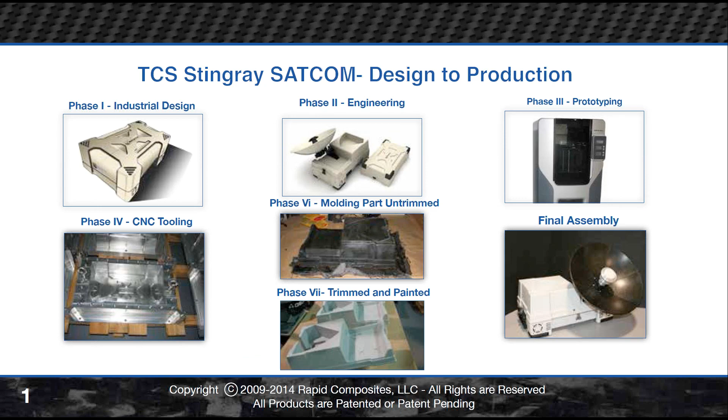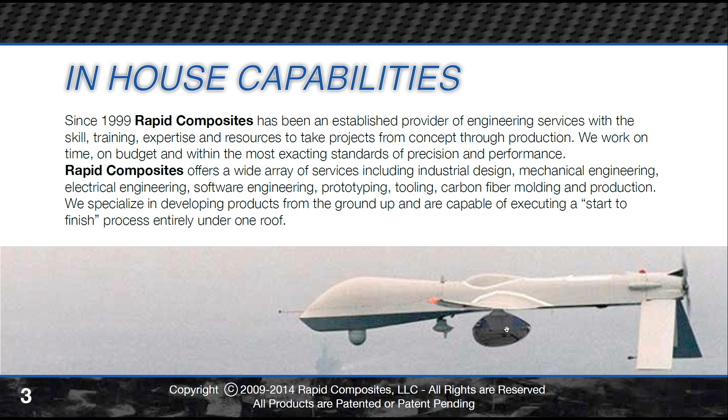We do industrial design, electromechanical engineering, as you can see my cursor here as I move along, rapid prototyping. We cut our own tools, we operate our own tools. This is a trimmed and painted component that goes to this mobile SATCOM device, and this was, at the time, the smallest mobile man-portable SATCOM system in the world. So we literally go from napkin sketch to full production in-house. This is a pod that we did for the Predator drone years ago, a 4-foot pod, to give you an idea. We have in-house industrial design, electromechanical engineering.

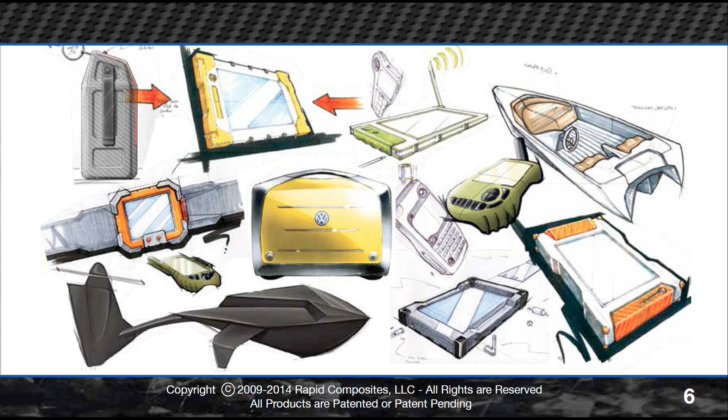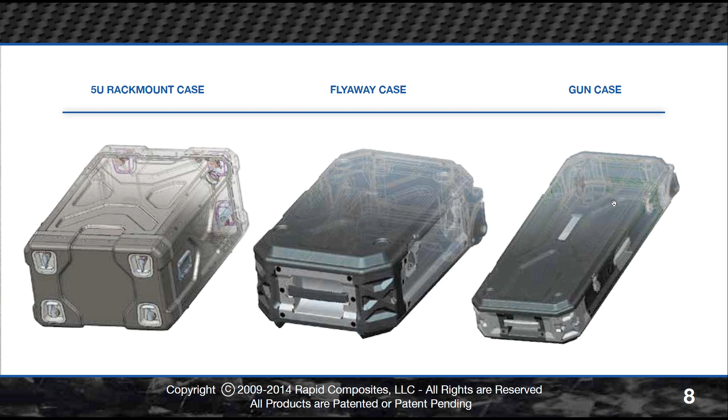We design and manufacture the lightest rack mount transit cases in the world, flyaway cases. We're even working on a new gun case right now. It'll be 30% lighter than anything on the market.

The bulk of the product that we make is for military applications, a lot of times for special operations type stuff. Most of it's domestic for here in the U.S., but some of it is done for international customers as well.

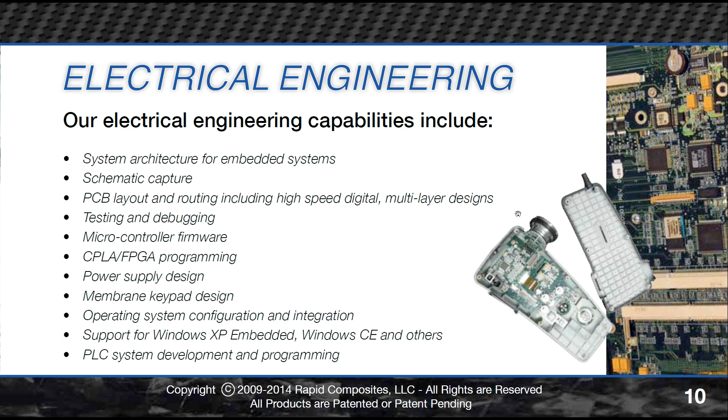We also have in-house electrical engineering capability. We do firmware, BIOS, and software. We have some testing capability, although over the years we've been trying to get out of the testing side of the business as much as possible, since most of our customers want third-party testing anyway.

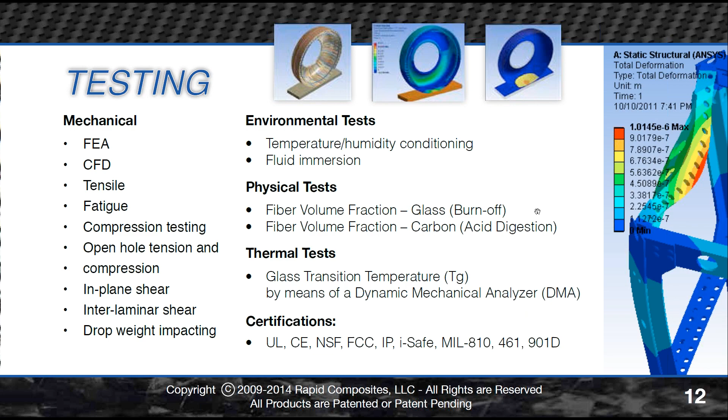Typically our stuff is matched metal tooling, core cavity tooling. The parts tend to be highly accurate. They're produced under a tremendous amount of pressure, and if you were to lump composite structures into two main categories, they predominantly fall under either a thermoset category or a thermoplastic category, and we work with both. But again, we focus on the high-speed versions of those processing techniques and materials.

We do in-house rapid prototyping. We spend a tremendous amount of energy on material science, really determining from the get-go what the best material selection will be for a particular project and process.

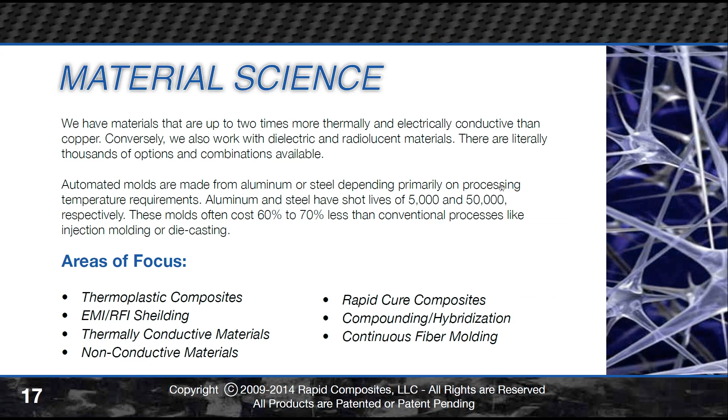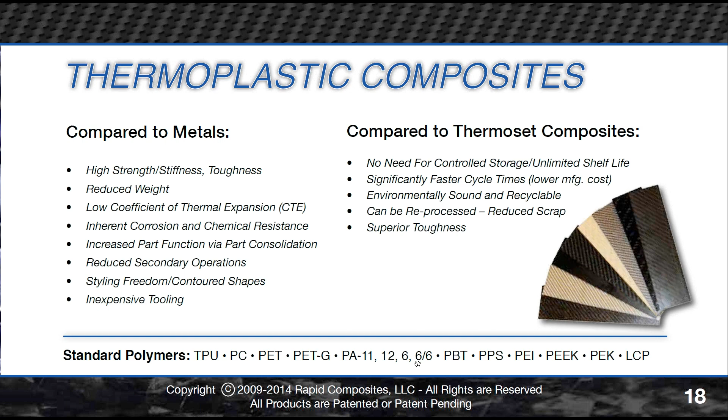This page right here, and we can get you, anybody who doesn't have a copy of this, the e-brochure. All of these thermoplastics you see along the bottom of this page here on page 18 are standard polymers that we work with in the thermoplastic stuff. And that'll become more relevant through my presentation, I'll explain in more detail.

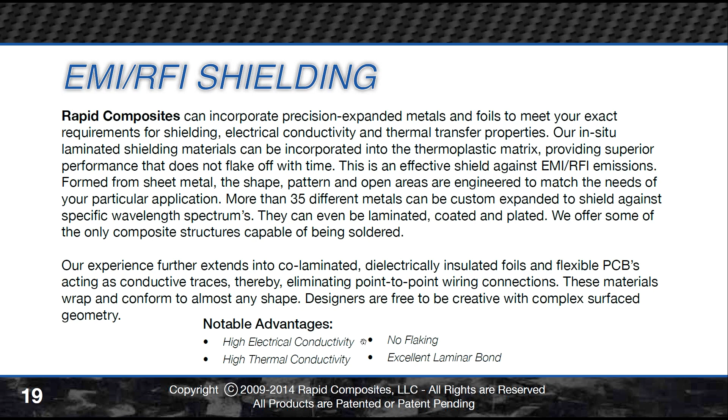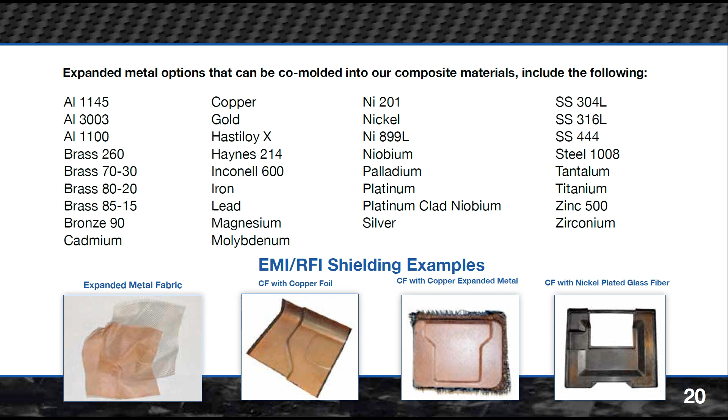We also do EMI and RFI shielding in some extremely unique ways. Right here on page 20, these are all metals that we co-laminate into structures for EMI and RFI shielding, and we're going to explain how a lot of this stuff is done, because in the UAV world, this is becoming more and more relevant, being able to strategically shield components that you want shielded versus ones that you might want in a dielectric material or a radiolucent material for radomes or antennas, that kind of thing.

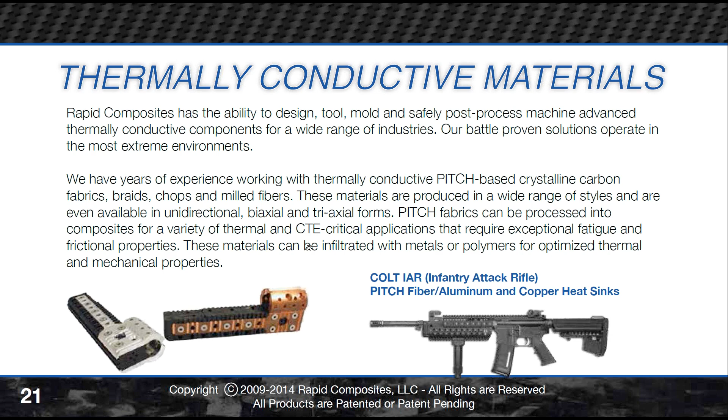We also work with thermally conductive materials. On page 21 here, it's kind of the start of it. We work with a lot of pitch fiber materials, and we create some extremely unique structures. We do everything from bonded fin designs with pitch fiber, which is a crystalline carbon material. We have pitch fiber up to 900 watts per meter K that we work with, so it's more than twice the conductivity of copper.

It's about half the density of aluminum, and therefore about half the weight of aluminum. What a lot of people don't understand about pitch fiber that really sets it apart is even when pitch fiber is at the exact same conductivity as aluminum, for instance, which is 200 watts per meter K, copper is 400 watts per meter K, about twice that of aluminum, pitch fiber's dissipative properties are about 4x that of aluminum. So therefore, it operates more efficiently than aluminum.

This may become a very relevant subject for some of you dealing with significant heat issues, like with speed controls or motors, that kind of thing. The way to think about pitch fiber is like a frying skillet. We've all fried eggs before, and if you were to use an iron frying skillet, for instance, and take it off the burner, it wants to store that heat energy for a very long time. Whereas an aluminum skillet will store that energy for a lesser amount of time.

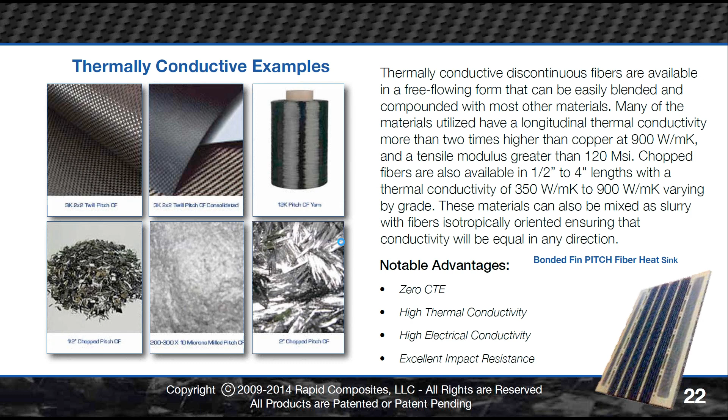Pitch fiber will do about 4x better than aluminum, so it's quite a bit more efficient. Now we work with a lot of conductive materials and superconductive materials, as you can see with pitch fiber, and we co-laminate metals in ways that are quite unique, where you can actually solder to the structures.

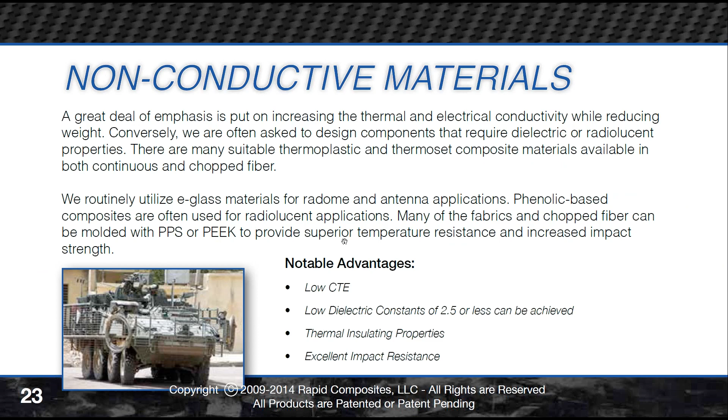We also conversely work with a lot of non-conductive materials. So we have materials like the ones you see here, in some cases like the e-glass polypropylene right here. It's got a dielectric constant of 2.5 or less. It's a very good durable material that we can mold extremely fast for radomes, belly pods, antenna caps, and that kind of thing.

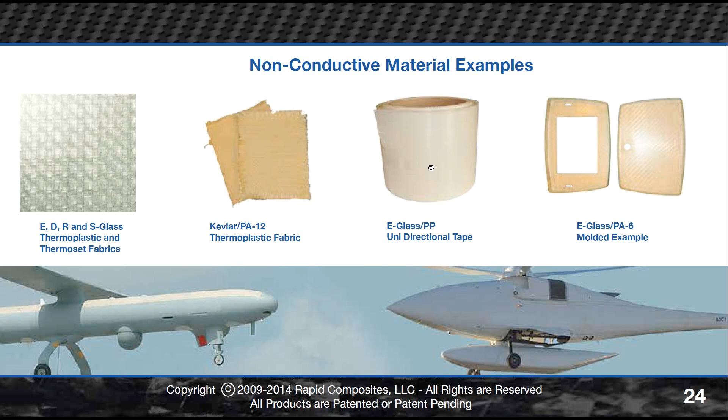In fact, in some cases we can actually combine it and insert-mold it into other materials that are more conductive. So for instance, we might shield around the perimeter and then have just one little spot that we plug into the mold that is non-conductive and radiolucent.

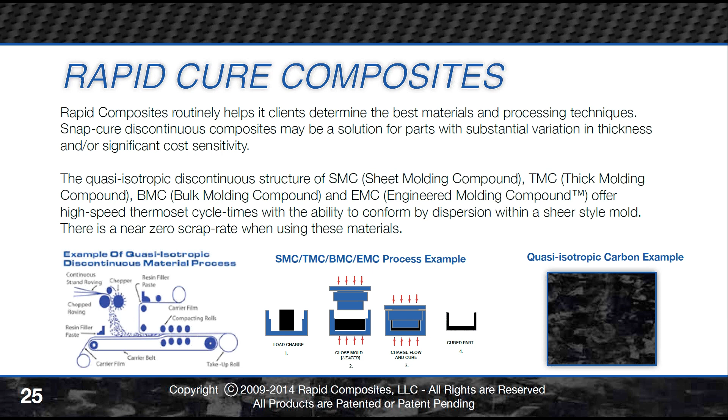So even when it's in a 2D form, it is 3D. It's very structural. And then imagine if you put a part into a 3D form, you do a highly contoured hull component, let's say for a UAV or a fuselage component. It's going to be massively more torsionally stable than you're going to get out of a typical 2D 3K kind of fiber, a woven type fiber. So another thing that we do a lot of is compounding and hybridization.

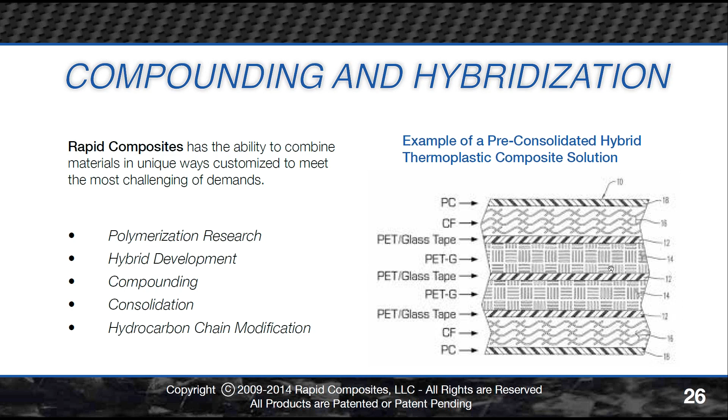So we get Class A surfaces on both sides, and that, up until this process, was pretty much unheard of in the thermoplastic industry. It's been a big problem for many years. Most thermoplastic components in the industry have been dedicated to behind-the-scenes components, things that you'll see behind the bumper of a vehicle, parts that you would never come in contact with unless a vehicle was in a wreck or something like that.

We do a lot of continuous fiber molding. That's going to be another thing you'll hear a good bit about in the follow-on presentation. We work with both continuous and discontinuous materials, and with materials that are pre-impregnated with thermoset resins, but also with thermoplastic resins.

We also work with them in drapable fabric form in both thermoset and thermoplastic categories, and in a pre-consolidated form where they're consolidated into a continuous thickness. For instance, we have materials consolidated at 1 millimeter, 2 millimeter, even quarter millimeter increments, up to 6 or 8 millimeters in thickness, that can be heated to their melt point so they become like a wet, drapable towel, hot stamped and simultaneously cooled inside a matched metal tool in a vertical press.

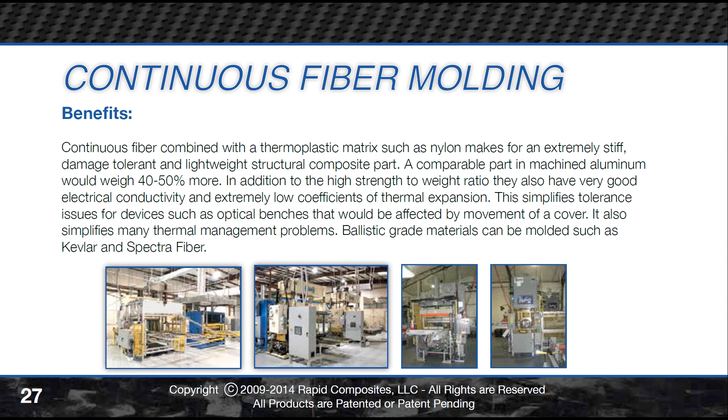There's limitations to it, and one is that it wants to be typically a continuous thickness. We'll get into more detail on that in a bit.

So just some examples. Not only do we go from napkin sketch to full production, but in-house we have all those engineering services I explained. We do rapid prototyping, we also cut our own tooling, and we have a massive machining capability in-house. We can machine 10 by 5 feet by 2 feet in-house.

We also operate our own tools. We design our own press systems, shuttle systems, carrier systems, and heater systems. This is an example of one we did. That's me standing next to the machine, to give you an idea of the scale. And I'm 6'4".

So this machine is basically about 32 feet long. The press sits on the back side. And we developed it for the floorboards for the Lamborghini Gallardo and the Audi R8.

Lamborghini is a customer of ours. We work with their ACSL, Advanced Composite Structures Laboratory, and we've been the behind-the-scenes partner on their thermoplastic work that they'll be putting on their next-gen vehicles. Their floorboards, at the time they came to us for the Gallardo and the R8 -- basically the same car, looks different externally, but internally the chassis and drivetrain is identical amongst those two platforms.

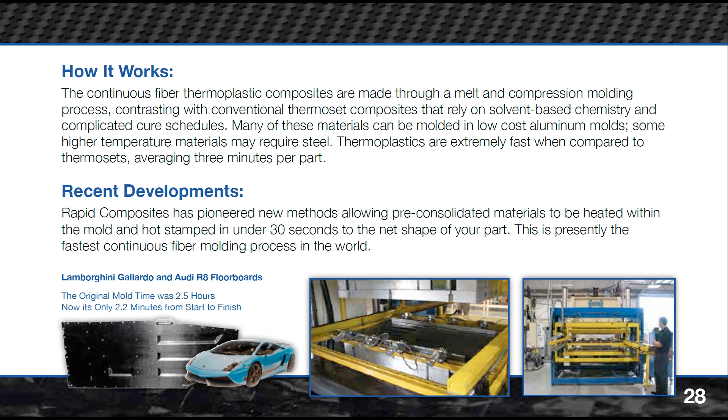The floorboards were being produced in 2.5 hours with their fastest vendor, using an autoclave approach. We took it, with this shuttle system, heater system, and press configuration, from 2.5 hours down to 2.2 minutes per part. So it's a very fast process.

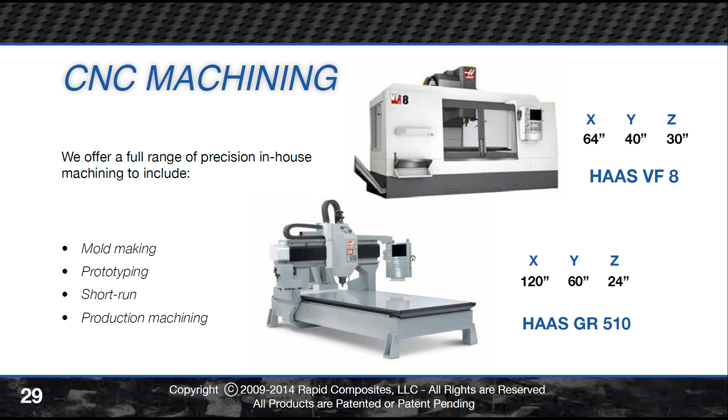This will give you an idea of the typical machining centers we work with -- big build envelopes and accurate, large build envelopes. And we're doing matched metal tooling a lot of the time. In most cases, it's matched metal tooling.

I'd say about 80% of the time when we're talking about mid-range volumes. Mid-range volumes would be anywhere from about a 200 unit per annum build to a 5,000 unit build. Assuming there's adequate draft on the molds, we can typically get 5,000 shots out of a single aluminum tool set, assuming they are plated.

When we have to go to higher temp materials, instead of running nylons or vinyl esters in the thermoset world, going to something like PEEK or LCP, liquid crystal polymer, which are real high-temp materials, we then have to go to steel molds. With steel molds, assuming adequate draft, if you do P20 with S7 inserts, 50,000 to 250,000 shots is possible out of those tools. So the volume can go up significantly.

Give you some examples of the types of products we do currently. These are all products we've produced in-house, and it's only about 10% of what we've done over the years -- it's just what I'm allowed to show.

This is a 2U rack mount system we did for a defense company. We do pin-fin heatsink solutions for ATR chassis, docking stations, and transit cases.

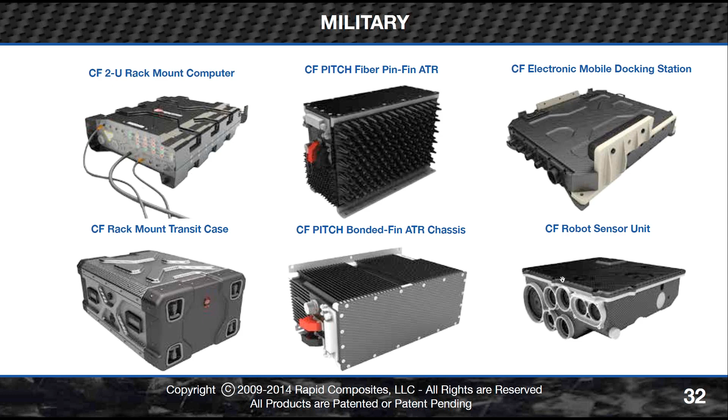This is a bonded pitch fiber solution, bonded fin design. This is a head unit for a robot. This is a positioner system for a 1.2 meter reflector. It's a gimbaled motorized SATCOM system, a KU band SATCOM system. We work on everything from LWTS, lightweight thermal weapons systems, to handheld computers.

This is that SATCOM system you saw in the beginning. These are pitch fiber heat sinks we did for a machine gun that perform substantially better than an aluminum heat sink. And we've done an aluminum and a copper version of that.

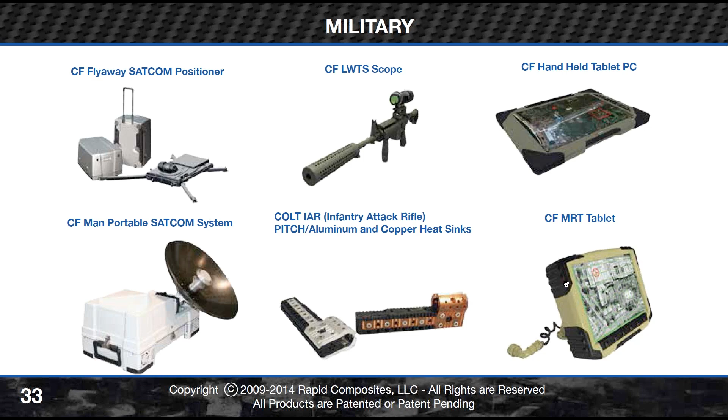We also do MRT type systems, mobile data type terminals for vehicles, including Humvees. This is a handheld device we produce, tablet computers, FLIR biocular displays, the cameras that give a 360-degree view around the Stryker, the Bradley, and the M1. Basically, every one of those armored vehicles gets this camera system that we designed. It's a thermal system. It's actually more a safety system and a security system than it is anything else.

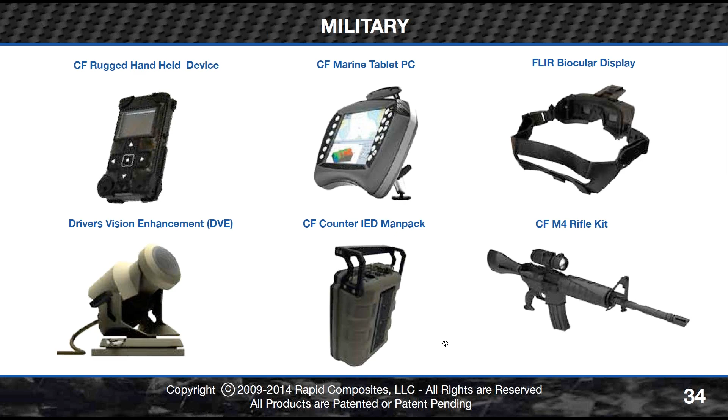We do composite structures for weaponry, all sorts of different kinds of handheld devices, tablet computers, even some commercial stuff. There's an eyelid retractor for ophthalmologists. This is a fiber optic system right here. It's an all composite structure with an aluminum chassis that gets bonded into it.

We make the best attaché case in the world, we believe anyway. This is for the Lamborghini Aventador, in fact, and there's cartridge bearings in the hinges of this and gas strut openers.

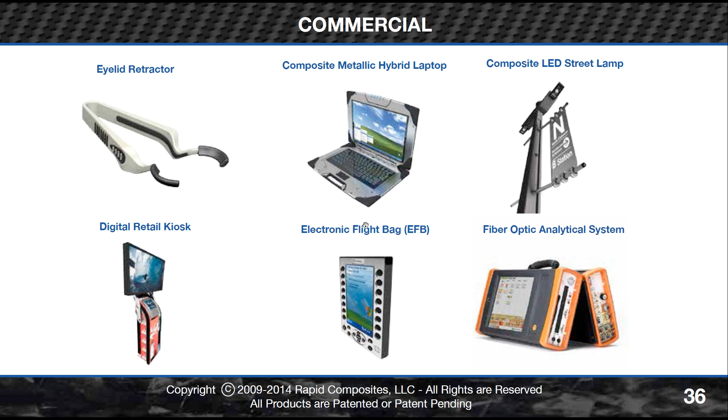Yeah. There is no purpose in the world for this, no practical or reasonable purpose for this product in the world, but it's a good showpiece for us to just show what we're capable of.

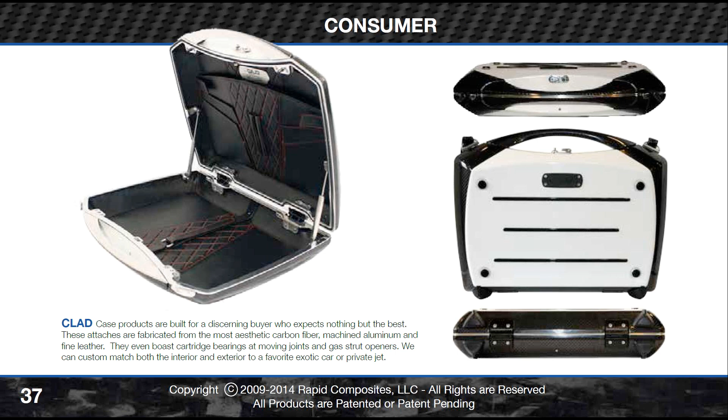Basically, every component on this product, except for the leather goods inside, we did in-house. They're pretty pricey. We're actually more inclined these days to not make them because they're so expensive for us to produce. Every fiber on this product has to be in the perfect place, and that's one of the hardest things to do with it. So the yield on production is not so good on this product.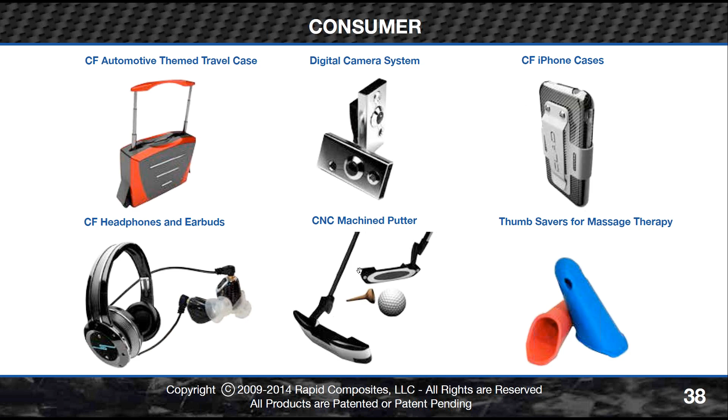So we've done earbuds and headsets and putters and a pretty wide array of products, as you can see, defibrillator, even grills. So we've worked on consumer products in the past. We do membrane keypad design.

One of our big things is, devil's in the details, right? Our objective is always to scrutinize every single component down to the last screw on the products that we manufacture. So we want our latch mechanisms to be the best and the most robust in the industry. We want them to be as ergonomic as possible and as user-friendly as possible. So our objective is always to make the best of the best of the best. You will see that across the board with the types of products that we do.

Our cam latch mechanisms are simple, they're rugged, they're ergonomic. There's no pinch points. We think through those types of things, and there's nothing worse when you've got a great product overall, but the human interface portion of it's not so good. What we've found in the past is, we do things like that for law enforcement. We develop product, especially things like handheld devices or mounting solutions, things that have a high degree of human interface with our customers. If they're not ergonomic and comfortable and easy for them to operate, they'll stop using them. And that can mean putting them in a dangerous situation if they're in law enforcement or military. So our focus is always to take those types of things into consideration in the products that we develop.

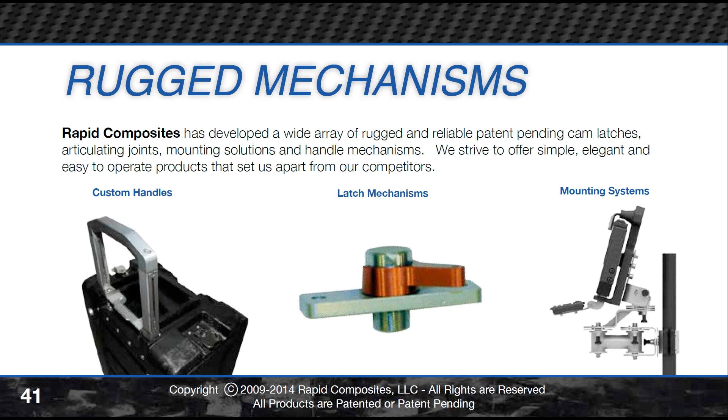These presses, there's two of them side by side. We've sold them to two separate customers. These presses operate on 600 amps at 480 volts, to give you an idea. So they're extremely powerful, electrically intensive machines, but they operate very, very fast. So the amount of energy that's expended per part is actually quite low.

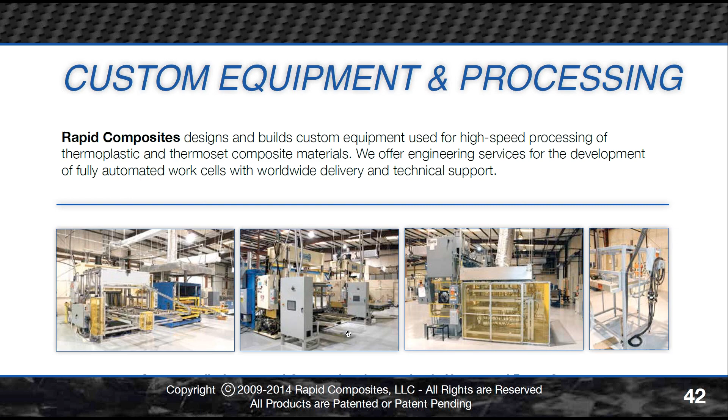So we're going to be using quasi-isotropic, discontinuous 3D fiber for the production of that fuselage. I'll definitely spend a little bit of time going over that process so everybody understands it, and offer our help for this cost.

So I'm going to move on to bring up that other presentation, Matt. I'm going to move on to the next presentation here, and I have a feeling this is going to bring up a lot of questions. The beginning of this, for a lot of you, is going to be the processes you are most familiar with, and you might even be doing right now.

So Alan, as you do your presentation, can we take questions while you're going? Mike, what's your suggestion on that? If you like, you can either do that or we can save them to the end. The only problem is we've got, how many slides do we have on it now, Matt? 65, yeah, I think it's 65. Yeah, I don't think we're going to go through all 65 slides. I can blow through a lot of them pretty quick. Maybe halfway through right now. Okay, halfway through. So I'll be happy to take any quick questions as I go through the presentation. Then at the end, I'm happy to stay online as long as I need to. Okay, does that make sense? Yeah, I think that's good.

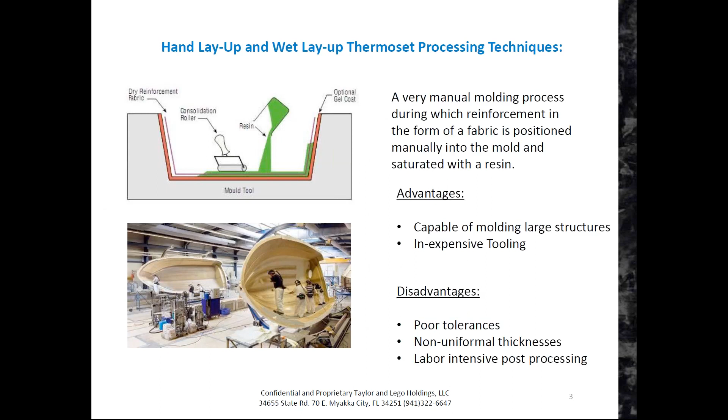Basically, this approach is you apply fiber and resin until you build up your desired thickness. In most instances they'll vacuum bag it, but there are people that still do not, and those people will have even worse variation in thickness. If you did a boat hull like the one these people are standing in, they probably have a variation in thickness of at least 1 inch, possibly even 2 inches, from one end to the other. So you end up with a lot of resin richness or resin deficiency, neither of which is good.

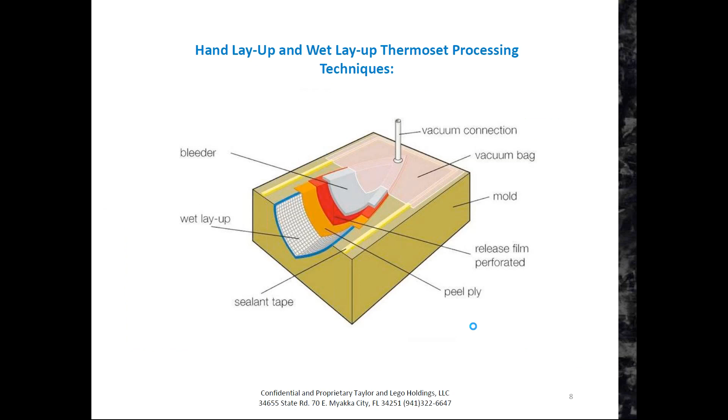So it's a very messy process with a lot of expendables. There's a lot of stuff that goes into the landfill. This is absolutely the antithesis to anything environmental, I can tell you. There's nothing environmental about this process.

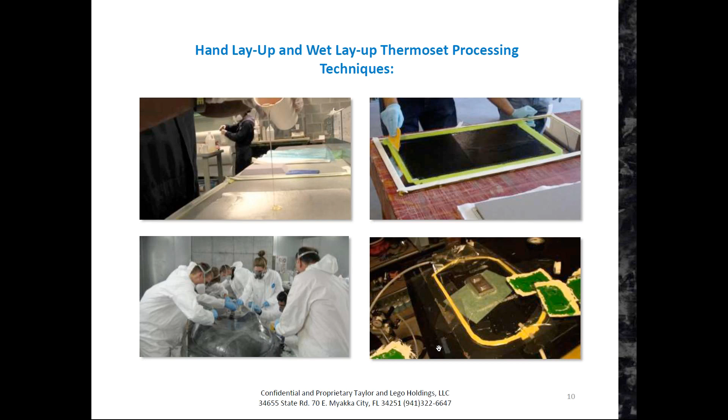The next process, number 2 most popular in the industry, is a step up from what you just saw. But I should go back for one second—there's something I forgot to explain. When people are typically doing a hand layup or wet layup process and vacuum bag it, they're pulling 1 atmosphere of pressure on that bag. One atmosphere equals 14.65 psi, so it's very, very low pressure.

In some cases, people are allowing this to air cure at ambient room temperature, and depending on the resin system, the specific epoxy, and the amount of catalyst used, among other factors, it can take anywhere from days to weeks to get your first part out of the mold. And not only that, because of the inaccuracy, the parts are going to be very difficult to trim and post-process afterwards.

Now, if the parts are small enough, a lot of people take these molds in the vacuum bag systems and put them into an oven. They're still only at 1 atmosphere of pressure, but they're causing the resin to kick faster by applying more heat. So you can get the parts a little faster, in as little as maybe 2.5 to 3 hours per part, but you still require that trim. On a very complex part, you could spend all day to get one part. This is what is being done 80% of the time around the world.

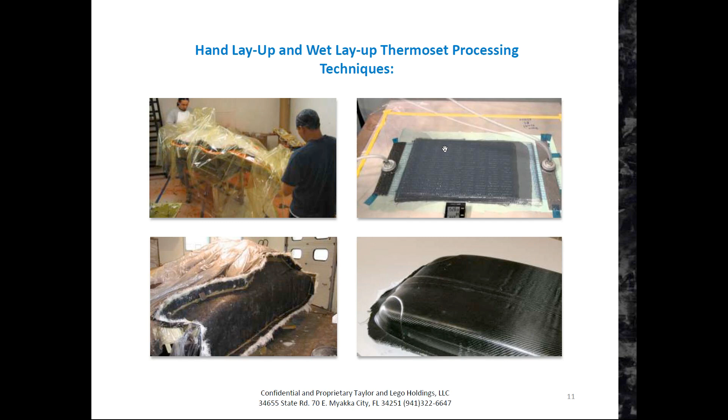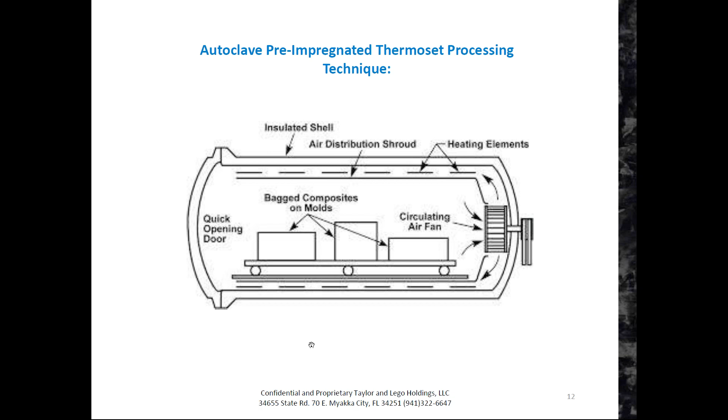The number 2 process is an autoclave approach, where sometimes they will use a more accurate tooling method. They might make a single-sided aluminum cavity mold and apply the materials to the inside, in a similar fashion to wet layup, except they're not brushing or spraying the resin.

A lot of times they'll apply it through a vacuum type approach, or they'll use pre-impregnated fabric materials, which is really the most popular with this type of approach. It still gets vacuum bagged, and the vacuum bagging process outside the autoclave is done to massage everything into place. It's still only 1 atmosphere of pressure outside the autoclave, but once it goes in, you can apply about 10 atmospheres of pressure.

So let's just say about 150 psi in total - that's literally 10 times the pressure on the part. So your thicknesses tend to be more uniform. But because it's still low pressure compared to the other processes I'm going to get into later, you still have some reasonably significant variation in thickness.

Just to put it in contrast, the variation in thickness on, let's say, a fender for a Ferrari - and Ferrari is very good at this process, we know them, they do an extraordinarily good job - a fender on a very high-end vehicle of theirs might have a variation in thickness of 20 or 30 thousandths of an inch from one end to the other. So about anywhere from 0.5 millimeter to 3/4 millimeter approximately.

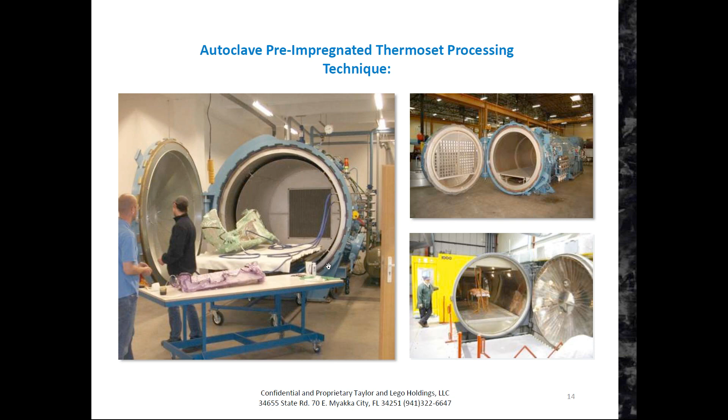So there's a lot of diagrams in here that explain the process. In the next categories, I'm going to try to move on as quick as I can because we're running out of time. Sorry if any of this seems a little disjointed - it's just a lot of information to try to cover, and it's important to understand these things before trying to understand why I'd suggest going to a more expensive tooling approach.

Alan, I think we'll definitely have to do a part 2, because this is really great information, and I think having a part 2 to go more advanced would be a good follow-up webinar for you to finish up the slides you did prepare. Sure.

So, the next processes I'll explain are RTM and VARTM. Okay, and these two processes - RTM has been around a while.

That's the third most popular approach in the composites industry as a whole. It stands for resin transfer molding, and VARTM is a kind of new spin on RTM - vacuum-assisted resin transfer molding. That's becoming more and more popular.

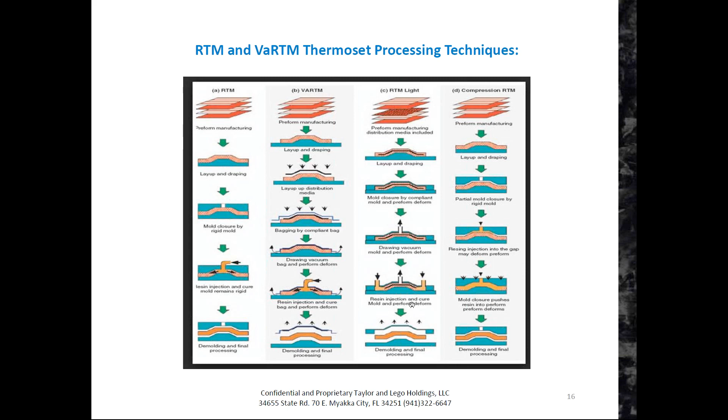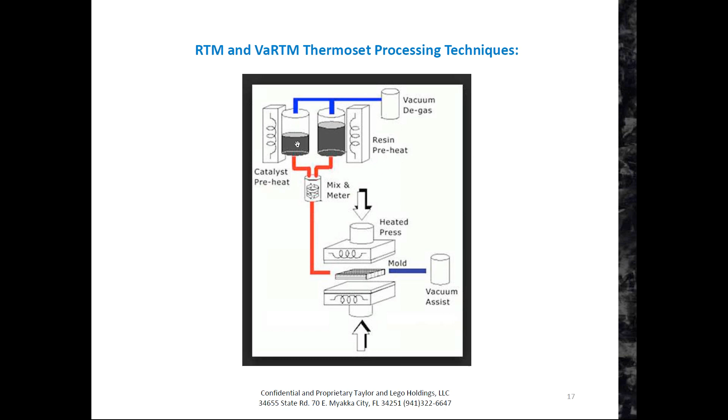There's so much to what I'm trying to describe right now in one hour - it's not funny. There's a lot of other diagrams in here that I included to explain different embodiments and variations of how RTM and VARTM work, and how you would layer the materials. There's a breakdown of structurally how you'd put together a mold and how you would seal it and shut it off.

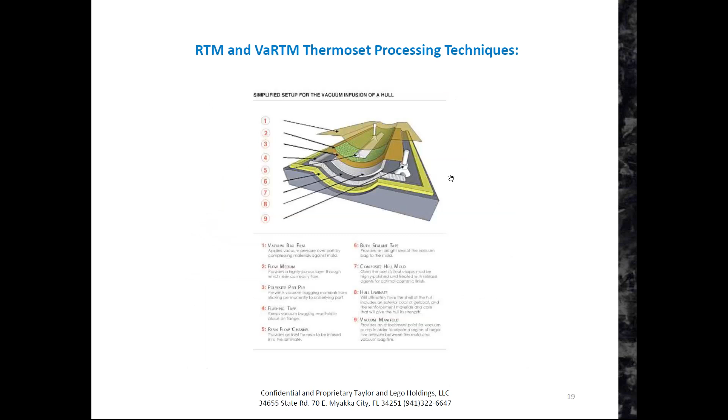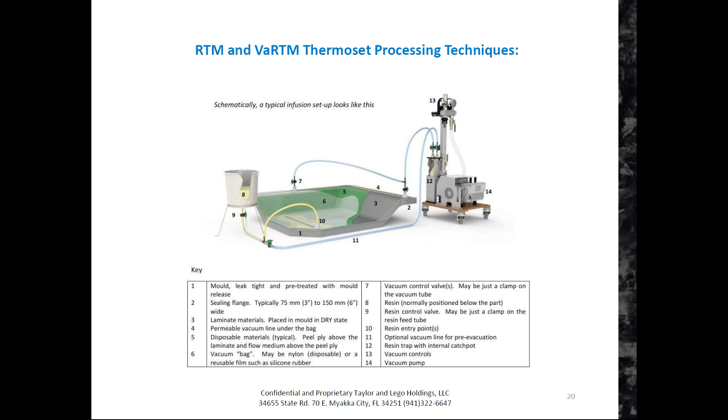This right here is a mobile unit. If you're doing a really large component - sorry, that mouse again, mind of its own - this mobile unit is a pretty neat system, and it allows you to move it around in your shop. While you're demolding one component, you could be going to another mold and working that mold while another's being demolded. This explains the process of how it works.

They are making one of these tubs in about 4 hours now, with the aluminum inserts and all of the bulkhead mounting for the engine and the suspension, the aluminum primary crash structures. So it's a reasonably efficient process, although still quite messy, and there's a lot of expendables that go in the trash and end up in a landfill for 10 million years. That's one of the bad things about all of these processes we've covered so far.

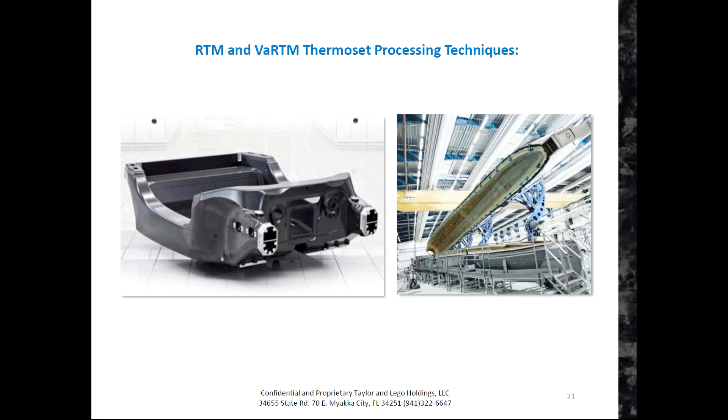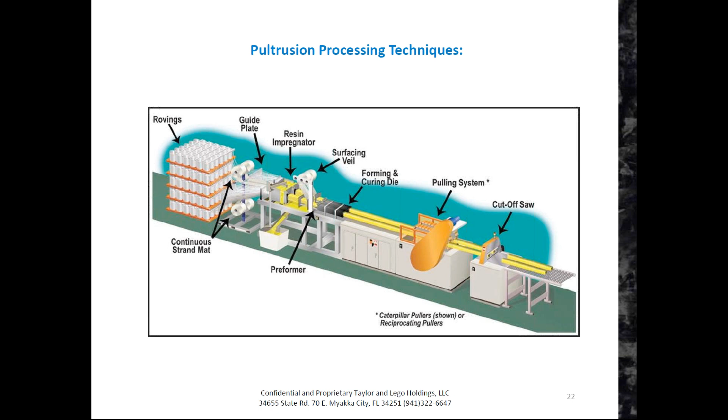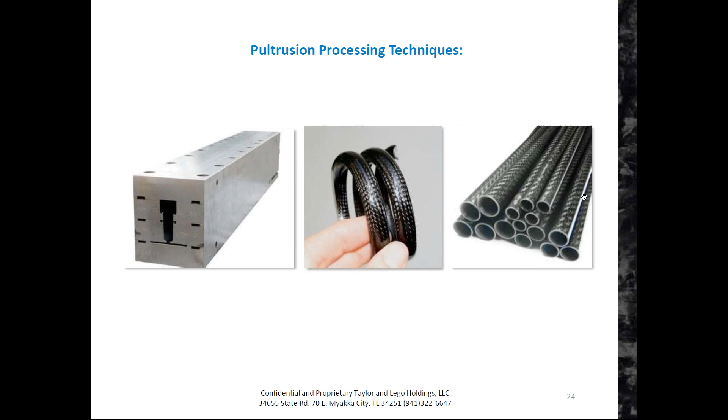We've gotta adjust this mouse, it's terrible. If I breathe, it moves. Sorry, little technical difficulty here. Let's see if I can fix it. Nine minutes left. There we go, that's much better, okay perfect.

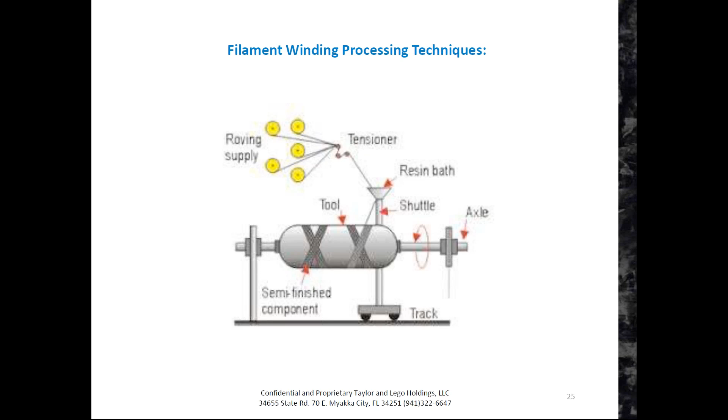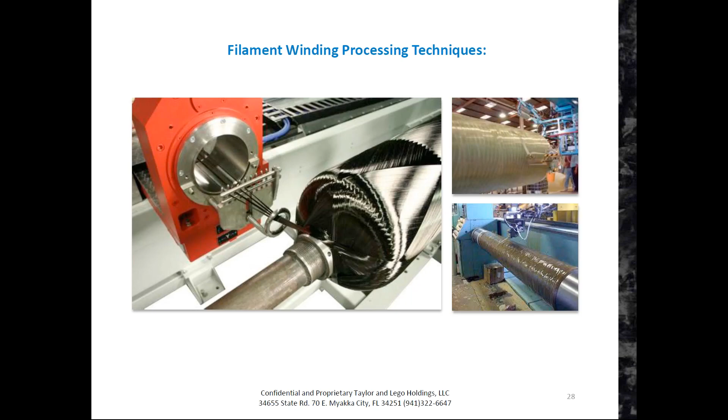You could also use smart tooling systems that you heat up, pull vacuum on, and extract a shaped tube out of the center, then reshape it to a mold. They call that smart tooling technology. That could be a part B or C video conference we might want to do in the future, but it gets even more complicated than this.

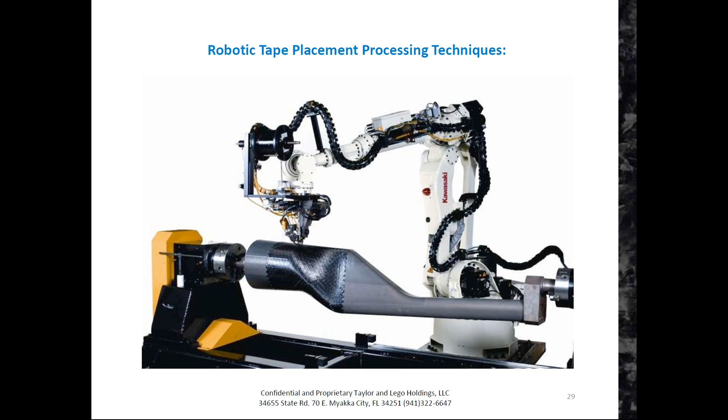These systems can also do thermoplastics. Right now it's applying a thermoset, but some of these machines are equipped with ultrasonic capability, where they ultrasonically fuse the tape layers together in thermoplastic form, like PEEK or PPS (polyphenylene sulfide). Sometimes they'll also use radiant heat or UV heat for fusing one layer to the other. It's a pretty sophisticated process, but not fast—of all the high-tech processes out there, this is probably one of the slowest.

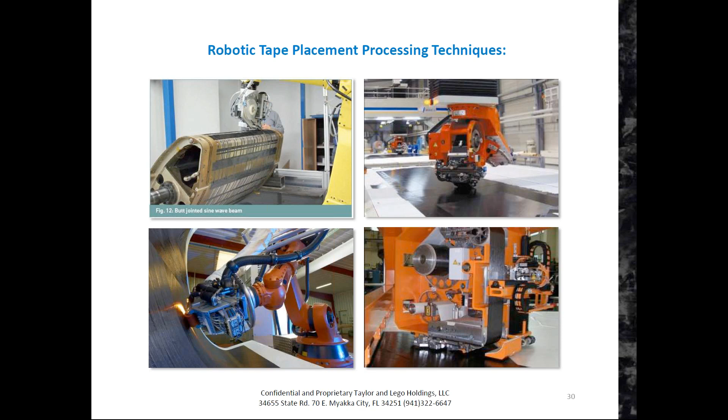You can imagine that could be a wing structure. Right here, this is on a table, so it's actually doing a tape structure where you're controlling the orientation of the fiber. This is a contoured shell on a mold angled at about 70 degrees. And this is a close-up look inside the head of one of these tape dispensing units. You can apply heat in many different ways—post-process outside of the mold and machine, or in the head of the machine itself with ultrasonic, UV, or quartz-type heaters.

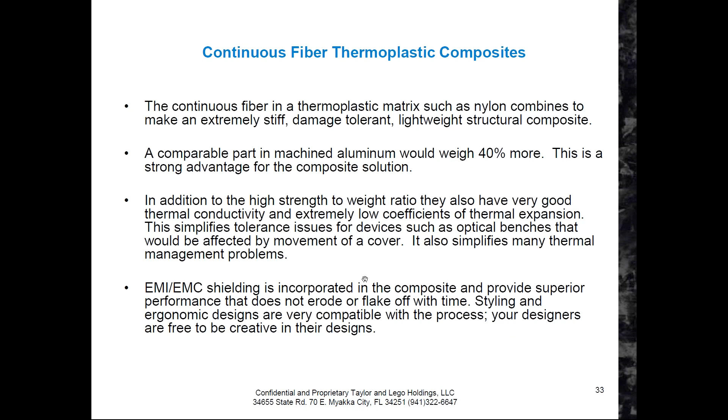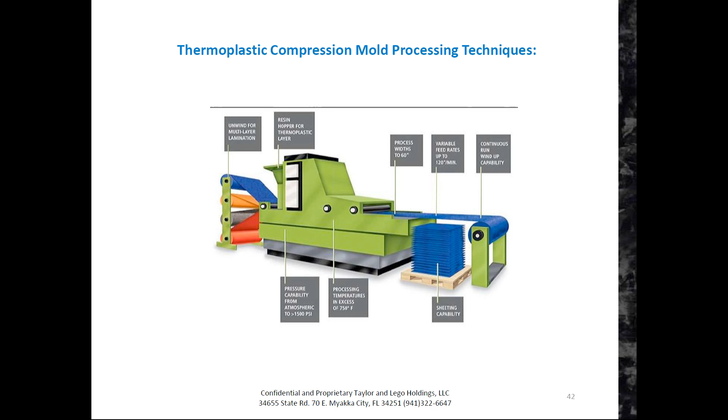The faster processes, which I've run out of time to go over with you, are the thermoplastic processes, from page 31 on. It jumps into the different thermoplastic processes and even explains how the pre-consolidated sheets are made. These are the fastest processes available right now. We can cycle from 5 minutes to 45 seconds. There's a whole bunch of different processes described here, and I'll blow through this really quick.

There's another thermoplastic process, behind the one that does continuous pre-consolidated sheets, that wants a continuous thickness. There's also something called thermoplastic hybrid injection molding, where you take a pre-consolidated sheet - it's kind of hard to understand what's going on in this.

This right here. Hey Alan, I think we're at a point where we can be talking next steps.

So if you were to sum up the ones that you think have the most promise for small run prototypes - and within the confines of our competition, we're looking for things like the lowest cost entry, things that are scalable on a global level - if you had to pick one of these processes, if we were going to approach you to involve ourselves in more of a 'let's get started' webinar, which would you pick, and what would you like to do for a next overview?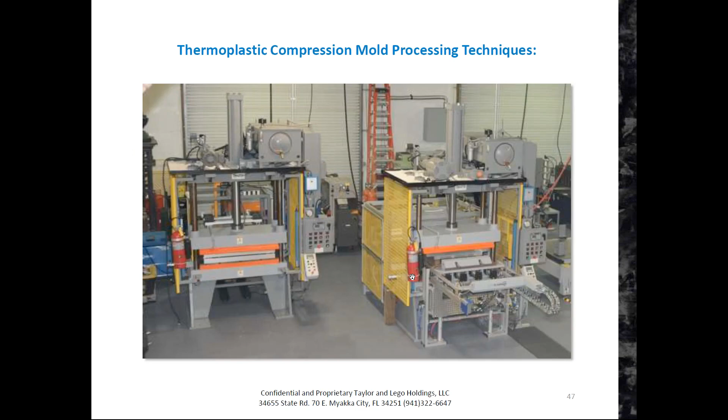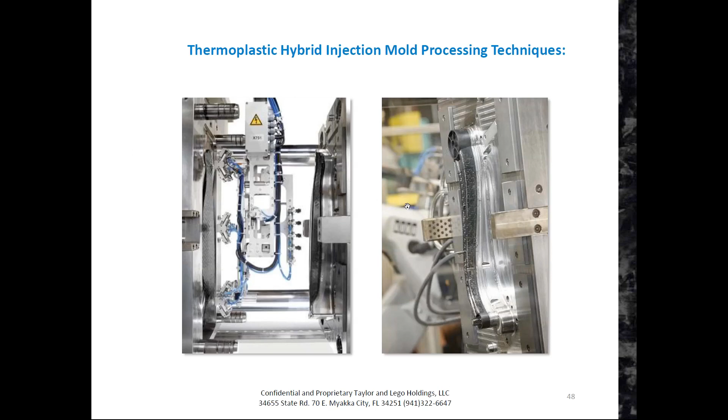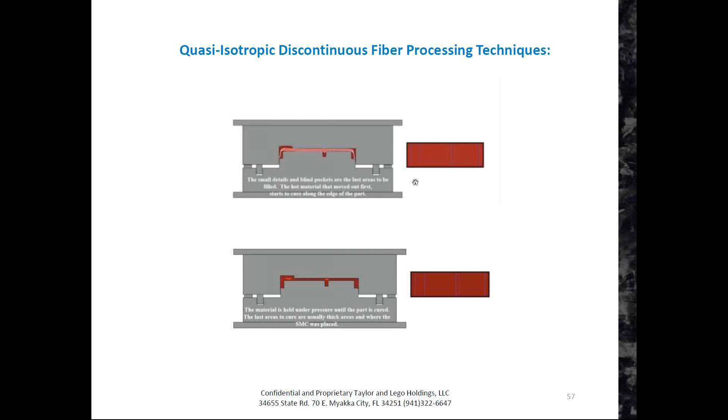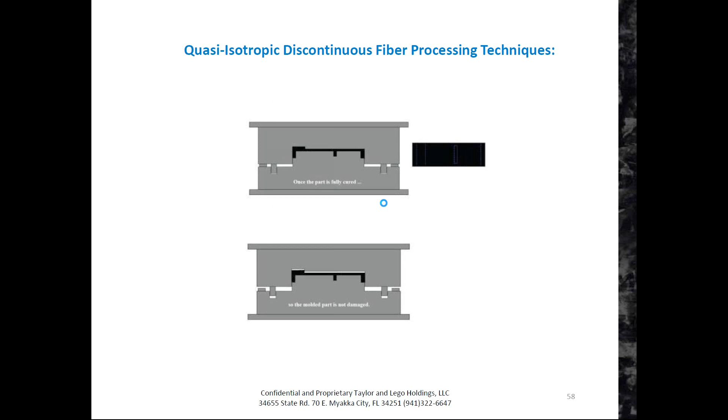Well, yeah, the thermoplastic process and the quasi-isotropic process, which is described right here - it literally shows, if you just scroll through this presentation, how you load material, it compresses, the mold's heated, it cures, the mold opens, and then the part's ejected. This type of process is probably going to be the most conducive, I think, in general for the UAV market.

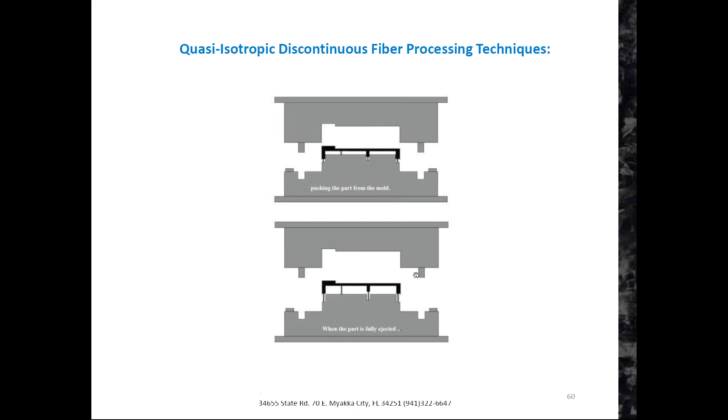It's flowable, so you can have huge variations in thickness. The tooling can be done reasonably inexpensively - for example, we can tool up a small 32-inch long UAV, everything, the entire fuselage, the booms, the tail sections, the kind of thing like you saw in our brochure, for probably in the neighborhood of around $35,000. The tooling could get 5,000 shots, and we can cycle it every 10 minutes, in some cases as little as 5 minutes. The thermoplastic tooling can potentially be even a little less, but the geometry is a little more constrained - it wants to be more of a continuous thickness and accomplish the variations in thickness with ancillary components.

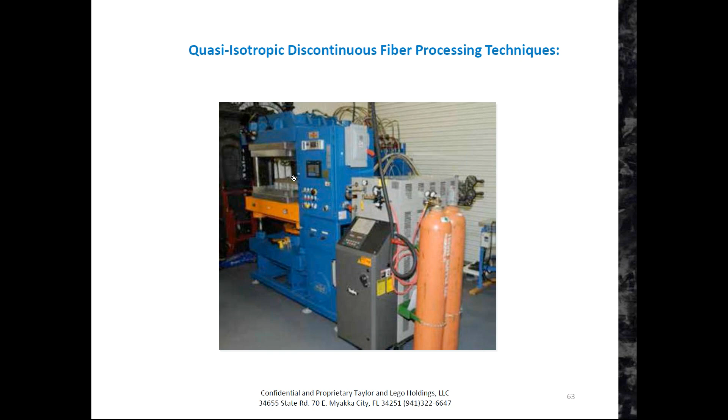This right here is one of our presses with 225-ton capability. It's a 28,000-pound press, and this is a 36 kW oil heater next to it - we oil heat the platens. The molds are very simple, straight pull, made of aluminum, so they're reasonably inexpensive. We produce them all in-house.

And just so you all understand, we will help for this cause - conservation of flora and fauna is very dear to my heart. Our facility actually sits on a nature preserve site that we self-fund, and we have rescued crocodilians on our property. We have a Nile crocodile, a Siamese crocodile, an American alligator, and giant tortoises on this property, all of which are rescues that were confiscated by Fish and Wildlife in the state of Florida.

So we're very keen to help any way we can, and we'll make costs of anything we're in control of and can help with as painless as possible if you wanted to work with us on the development of your products. So I'll make that offer to you. This isn't a business thing for us at all in this situation - it's really about the conservation side of it. So anything we can do, even if that's pointing you in the right direction and you go elsewhere and do it, we're happy to help with that, and in pursuit of the cause.

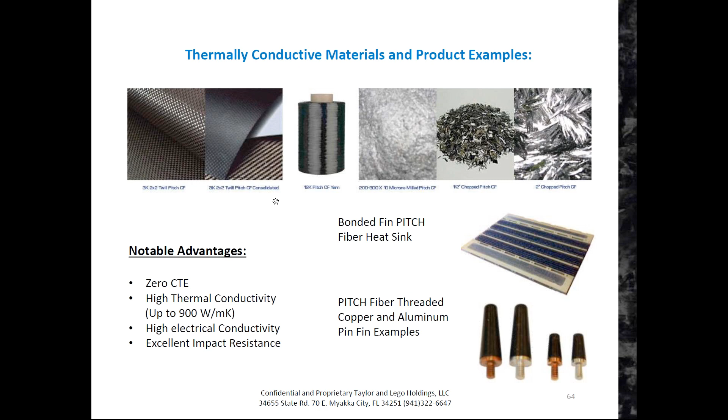So there's a lot of stuff I didn't really get to talk about that we can go over another time. Like we do pin fins that are heat sinks, and you can thread those in anywhere that you need a heat sink. That's one of our new patented technologies. There's more descriptive data here on co-laminating the metal and also the dielectric stuff.